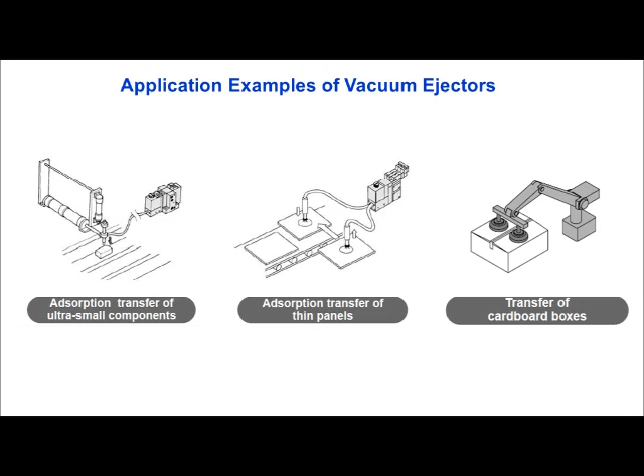This is a vacuum ejector fitted with a pressure switch. These are the vacuum pads. And this is the workpiece to be picked up and transferred.

Vacuum ejector operates on the Bernoulli's principle that demonstrates a pressure drop when airflow velocity is increased by a restricted orifice within a pipe. This creates a suction through an orifice at this point.

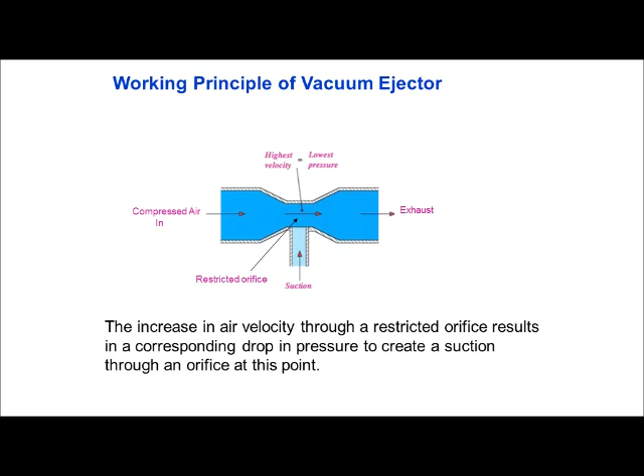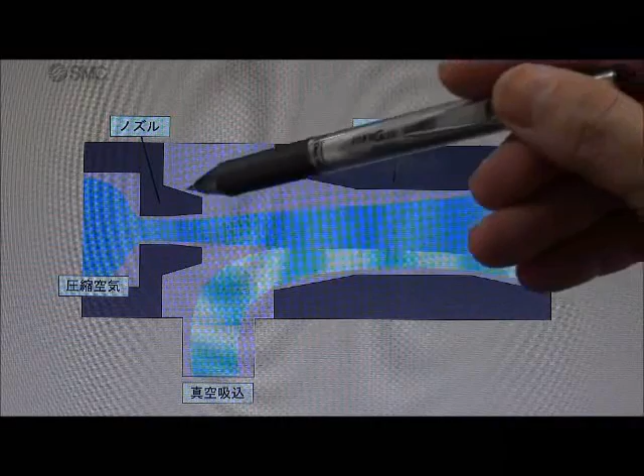Let's look at the animation. This is the nozzle and diffuser. This is the vacuum port for connecting a vacuum pad. Compressed air is supplied at the input port and exhausted through the exhaust port. This is the suction flow.

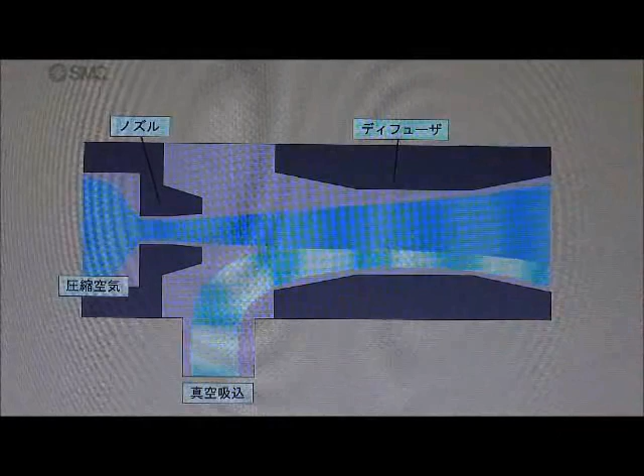Single-stage vacuum ejector consists of a single nozzle and diffuser. This picture shows a single-stage vacuum ejector with a high vacuum pressure but low vacuum flow rate. Single-stage vacuum ejector is used with one vacuum pad.

This picture shows a single-stage vacuum ejector with a wider diameter of nozzle and diffuser than the previous vacuum ejector. With a wider diameter, vacuum flow rate increases while vacuum pressure drops. This shows that single-stage vacuum ejectors are designed for either high vacuum pressure or high vacuum flow rate, but not both.

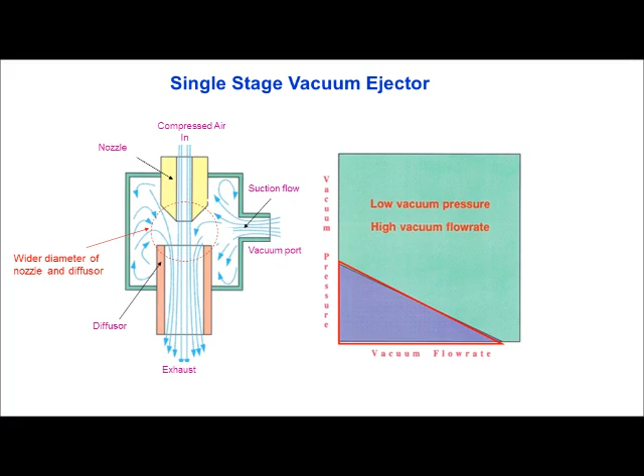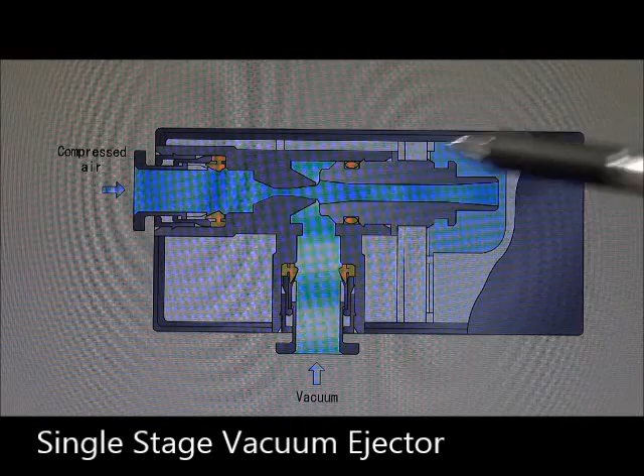Let's look at the animation of a single-stage vacuum ejector. This is the nozzle. And this is the diffuser.

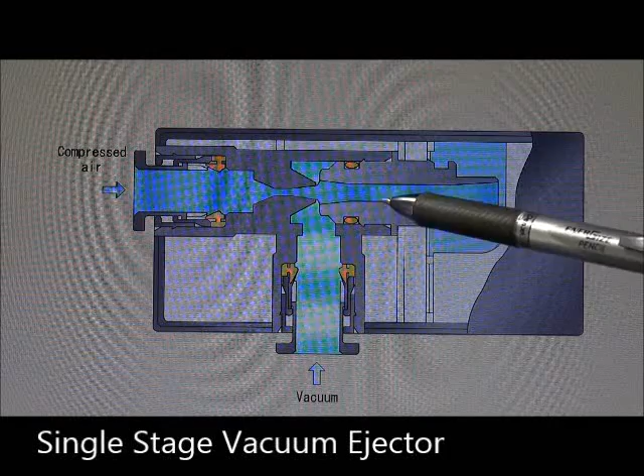But my application requires high vacuum pressure to ensure high lifting force and high flow rate for fast pickup. What should I do?

Fret not, SMC has the answer and solution. Introducing SMC two-stage vacuum ejector.

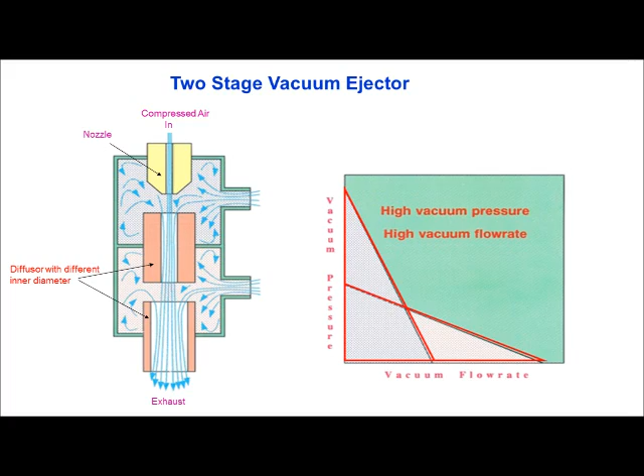In a two-stage vacuum ejector, the first stage creates a high vacuum pressure while the second stage creates high vacuum flow rate. The second stage is not a second nozzle but two diffusers with different inner diameter. Up to 2 vacuum pads can be used with a two-stage vacuum ejector.

Let's look at the animation of a two-stage vacuum ejector. This is the nozzle and the first diffuser and second diffuser. Both diffusers have different inner diameter.

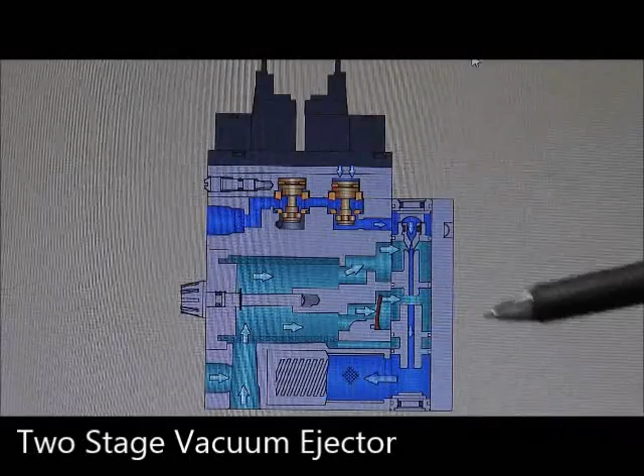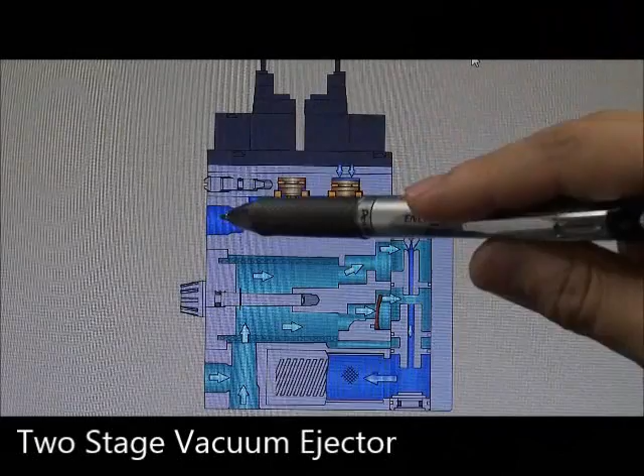This is the vacuum port to connect a vacuum pad. Compressed air is supplied at this port and exhaust through this exhaust port.

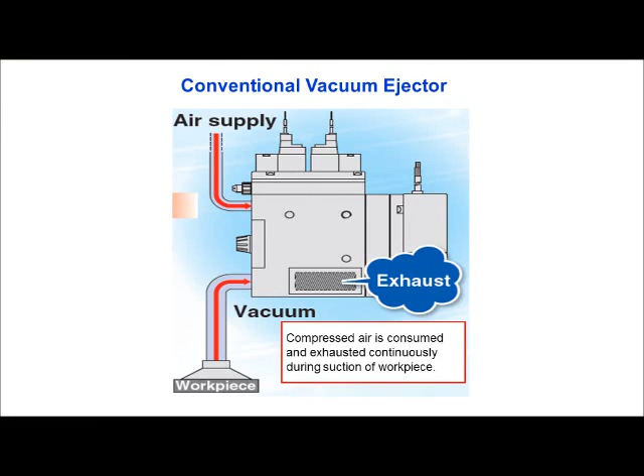Conventional vacuum ejector consumes compressed air continuously during suction of workpiece. Is there a vacuum ejector that does not consume air during the suction of workpiece? Yes, there is. Really? This must be an amazing product. Quick, show me.

Introducing the SMC 2-stage energy-saving vacuum ejector series ZK2. This vacuum ejector uses a digital pressure switch with energy-saving function. This function reduces air consumption by 90% or more.

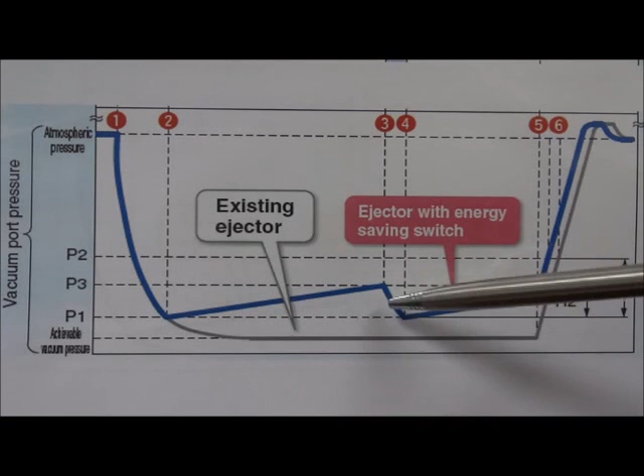When the vacuum pressure decreases from P1 by the amount of H2, the pressure switch turns on the supply valve and automatically controls it to maintain the vacuum pressure.

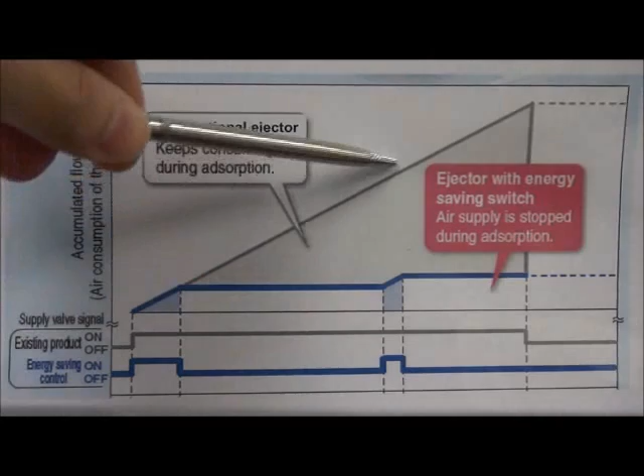This graph shows the accumulated air consumption of a conventional vacuum ejector and the ZK2 vacuum ejector with energy-saving switch. The gray line represents a conventional vacuum ejector. The blue line represents the ZK2 vacuum ejector.

Let's look at the signal here. During the suction of workpiece, the supply valve is off. Hence, there is no air consumption. A conventional vacuum ejector, on the other hand, keeps consuming air during suction of workpiece.

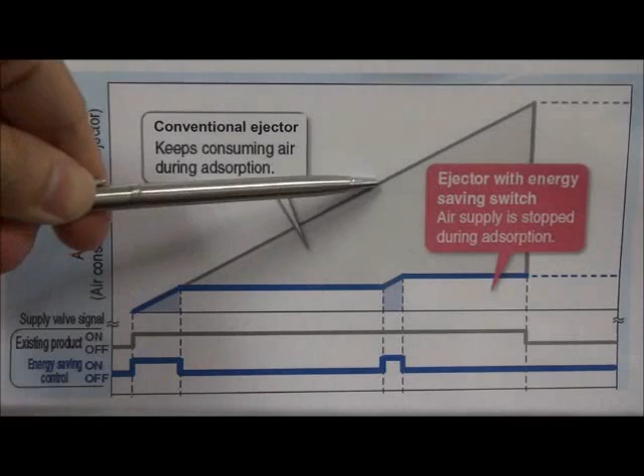This graph shows that the ZK2 vacuum ejector consumes much less air than a conventional vacuum ejector.

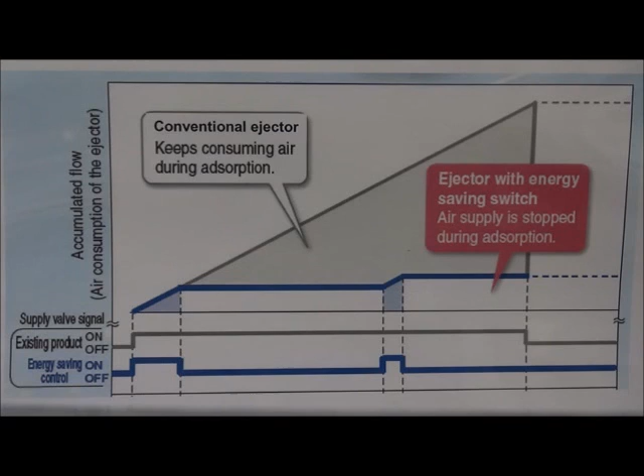For larger suction flow and for use with more than 2 vacuum pads, use SMC 3-stage vacuum ejector. The 3-stage vacuum ejector consists of a nozzle and 3 diffusers with different inner diameter. This unique design increased suction flow rate by 250% and reduced air consumption by 20%.

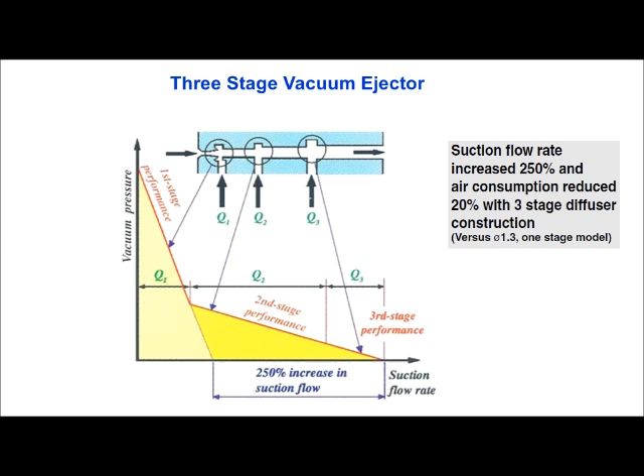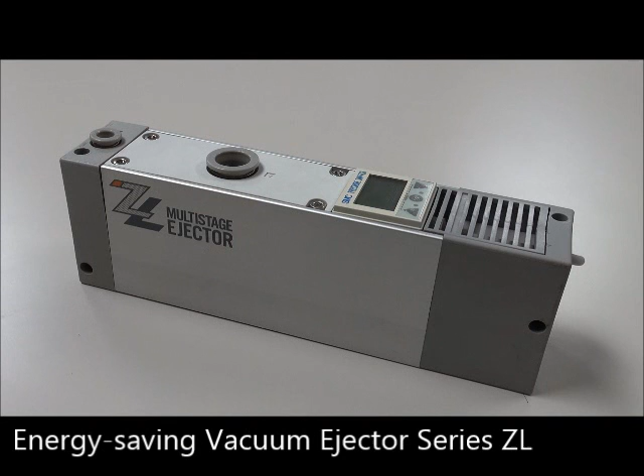Introducing the SMC 3-stage energy-saving vacuum ejector series ZL. This is the SMC 3-stage vacuum ejector series ZL. This vacuum ejector is fitted with a digital vacuum pressure switch.

This port is for the compressed air supply. This is the vacuum port for connecting the vacuum pads.

The Series ZL has 2 variations. Series ZL212 has diffusers stacked and integrated to achieve twice the flow rate of ZL112 in a compact body.

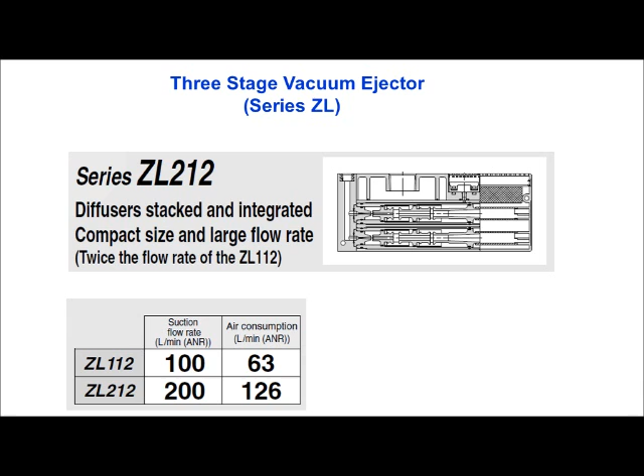Remember, use series ZK2 for up to 2 vacuum pads and energy saving. For larger workpiece that requires more than 2 vacuum pads and for energy saving, use series ZL.